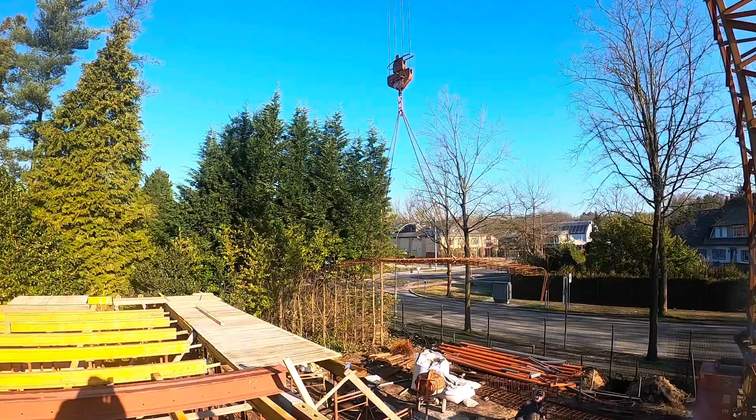Another cage, Johnny Cage.

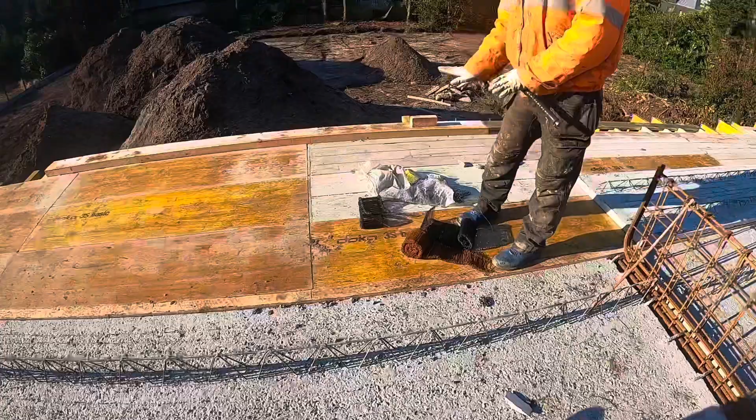You can create this beam. You can put the net here because here is a special net. The net goes like this. We need to bend it up and go into the beam.

Yeah, it's Monday. Bloody Monday.

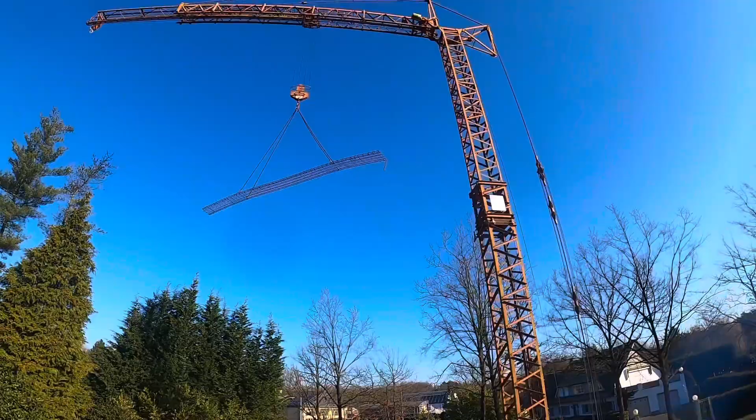So I expect the rest of the floors this noon. So this afternoon we will be setting them. Now we're gonna prepare some rebar here and there. Luckily we have good weather.

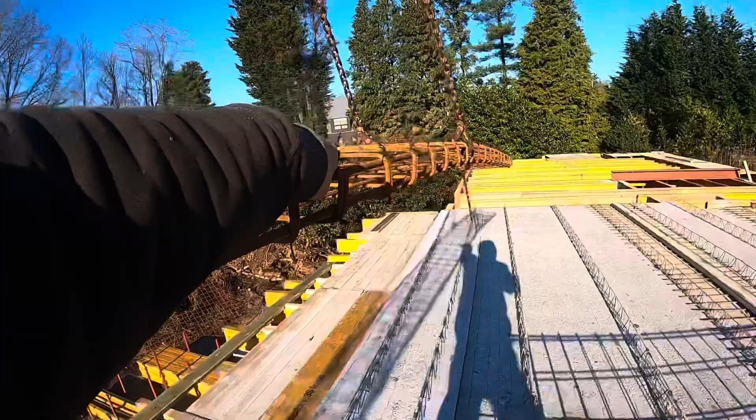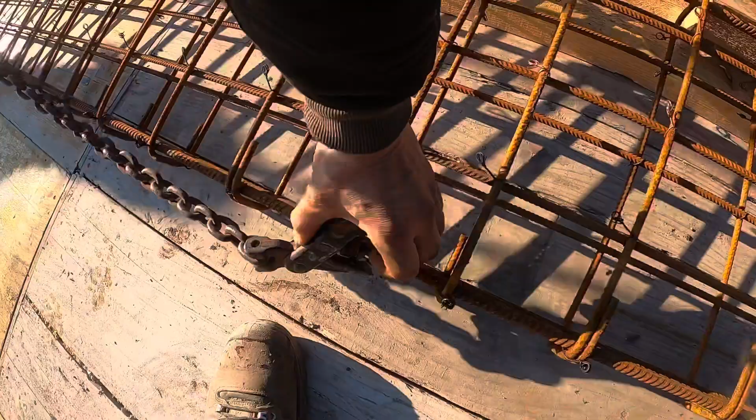Cage man, always wanted you to be cage man.

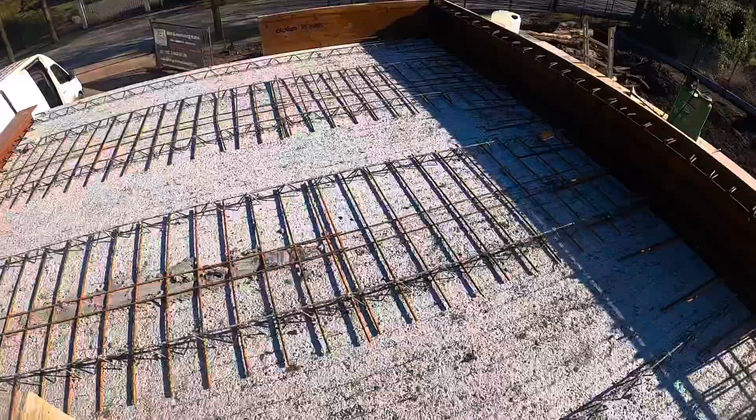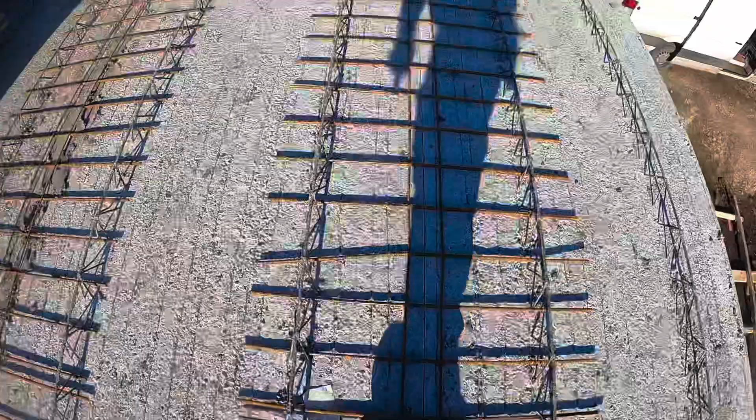Okay, so this rebar is already in place, but this is on every joint of the plate. We place this reinforcement. It will prevent cracking of the ceiling and stuff. The beams are placed. Time for some rebar.

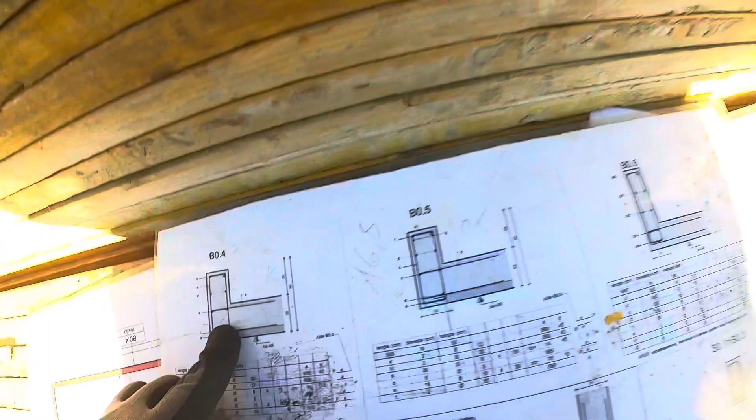So for example, B01, this beam number 1, is this one here, the red one. And there are pins, so B01, I go to the cut. B01 here, we see these pins installed. So before we close the shuttering here, we need to make sure we installed everything that needs to be there.

But that sounds logical.

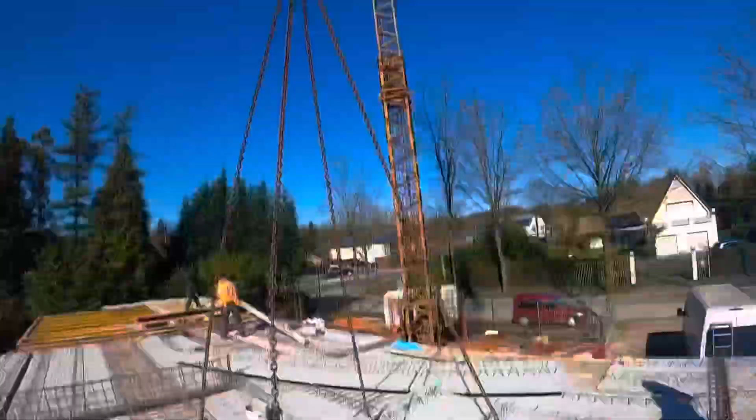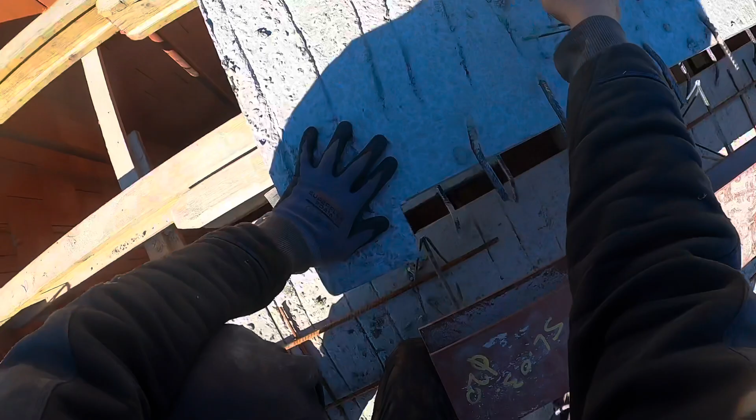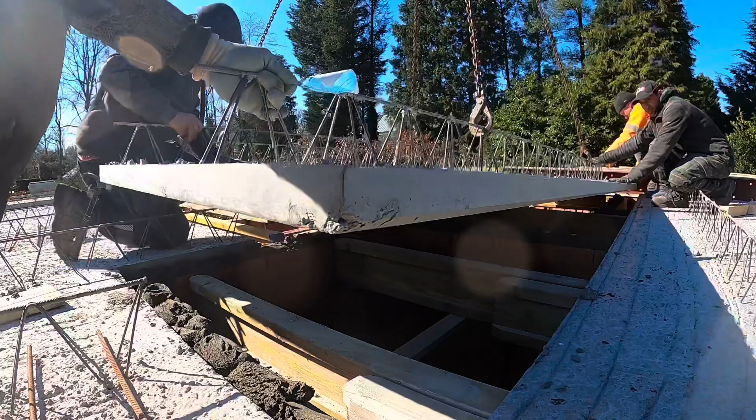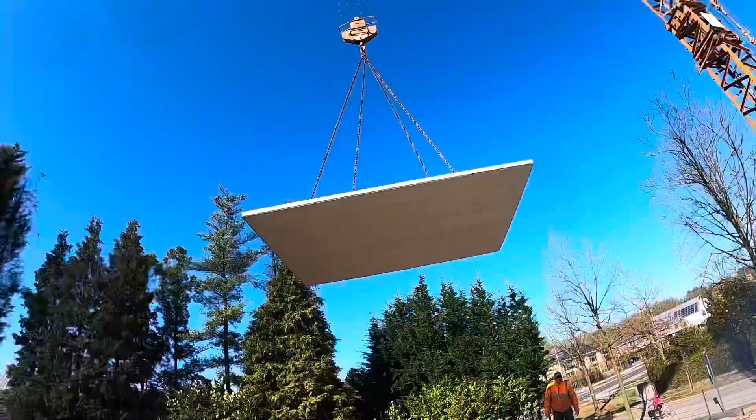So here it goes smoothly. I like it a lot.

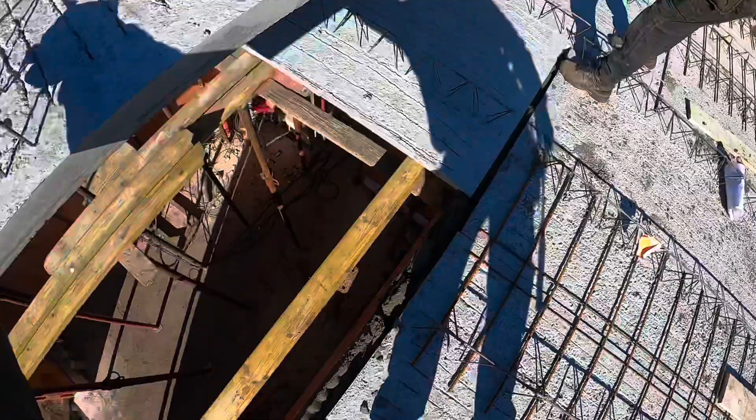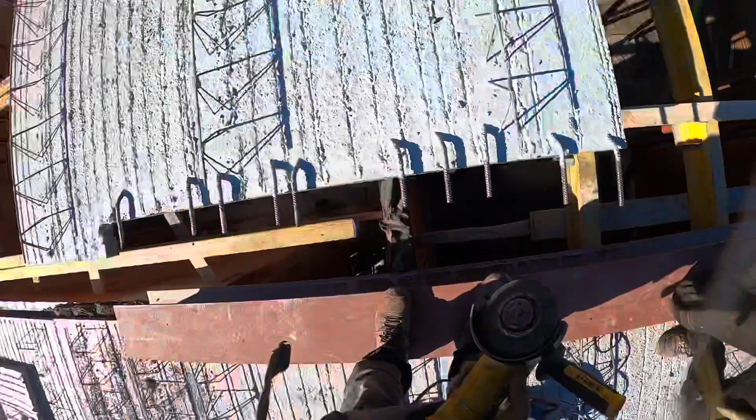I have 5 here. This one we need to cut. Yeah, these two. Long one. Metal disc. Small disc. Yeah, these two, yes. We need to cut because we need to go more into the beam.

Very nice, very nice. We can. Oh, wait a minute. Yeah, it's possible. Just a little bit. Oh, yeah, okay.

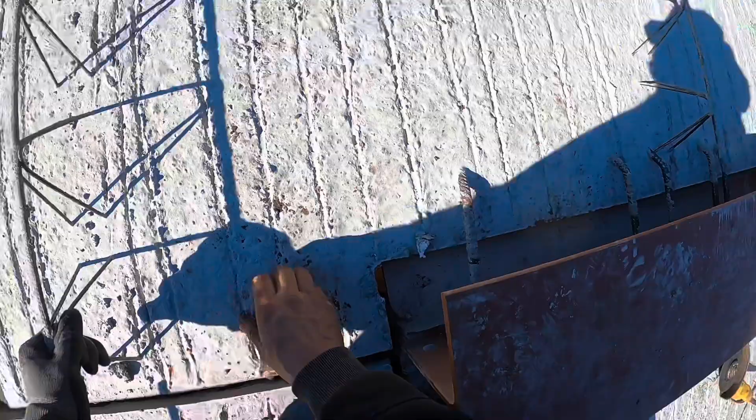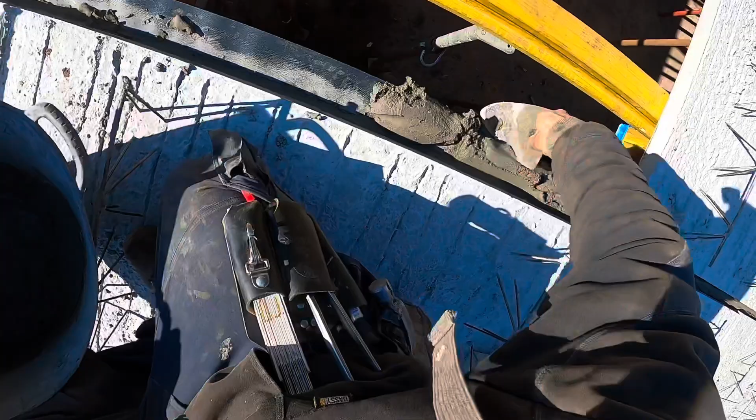So it's actually like bricklaying, yeah. Only the bricks are giant, and you need a crane.

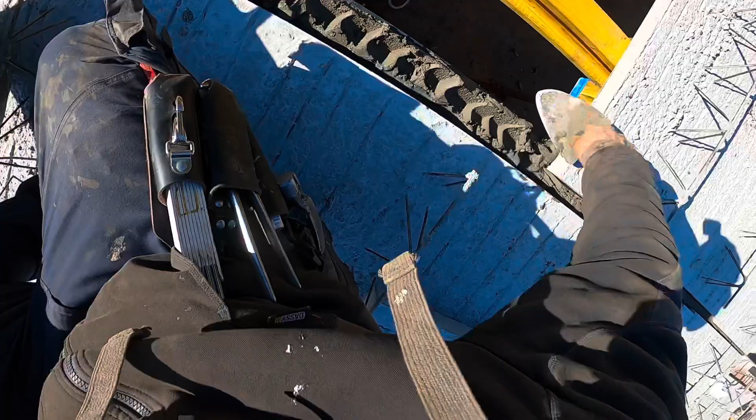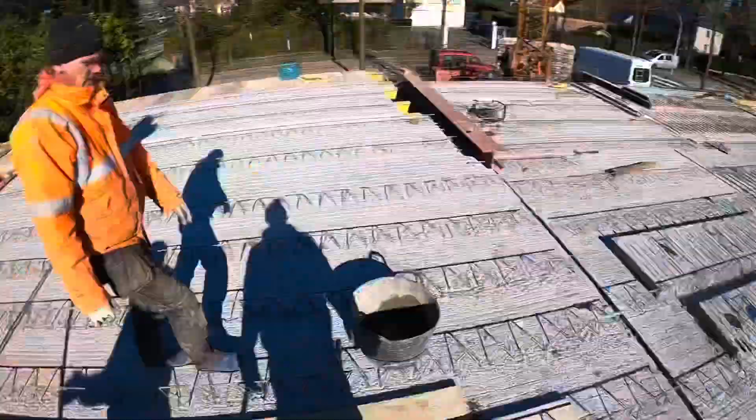This is the last one. It is the last one. It's the last one. No, not true, two small ones there. The guys will put it.

I think for the rest of the day that's remaining, we're gonna do some rebar.

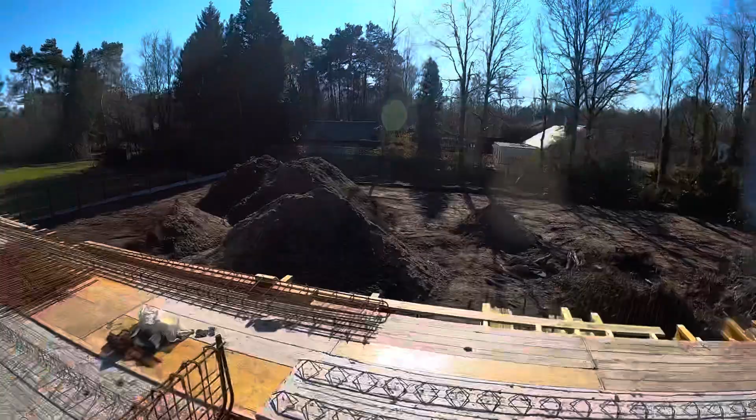We have some internal beams inside the slab also. It's like a hidden beam, but it's important because they run some bigger rebar through it for the overspanning.

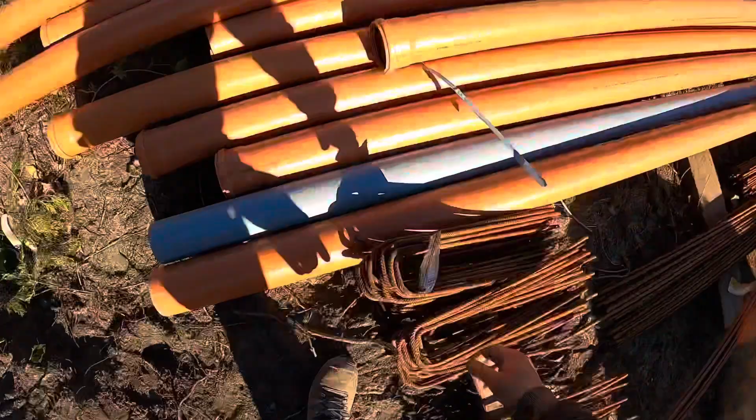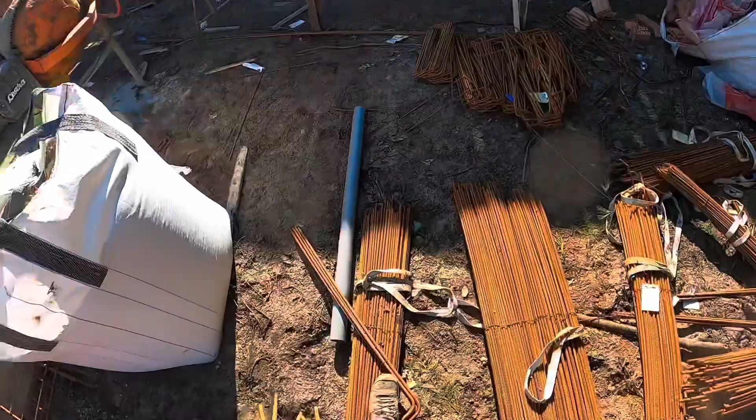Yeah, so actually these are 1055 and I actually need 955. I think the company were a bit lazy and they made them also 10, but hey, no biggie, no biggie, biggie smalls.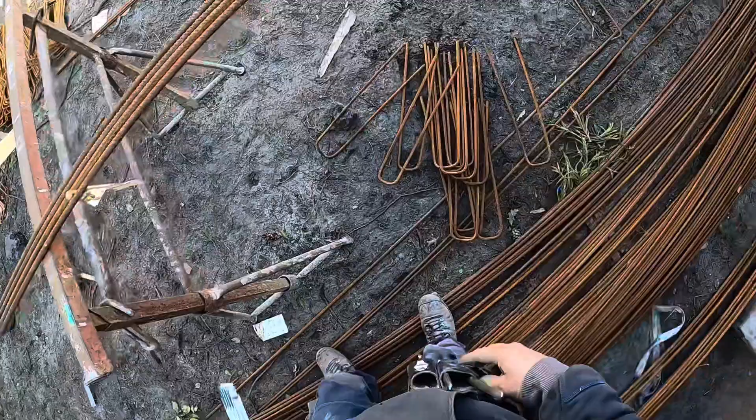It's like a small hidden beam in the slab, this one. It's at the end of the slab actually, yeah.

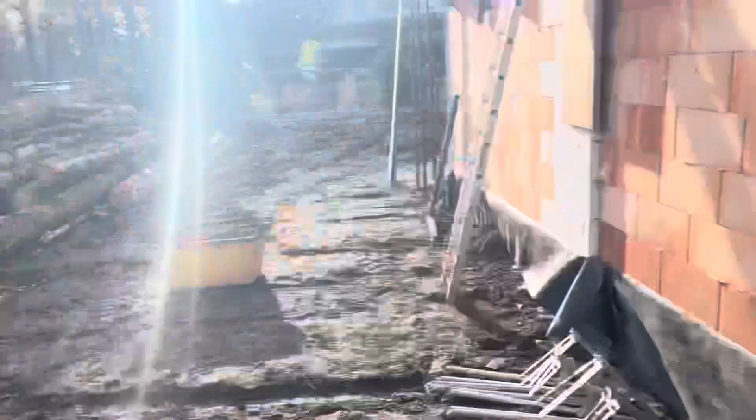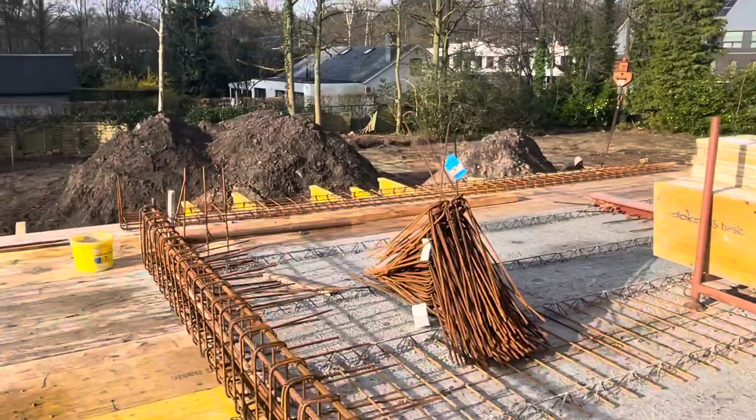It's time for some rebar. So there's a lot going on for the rebar. So it's actually a combination of the precast floors and the rebar that will form a big concrete slab.

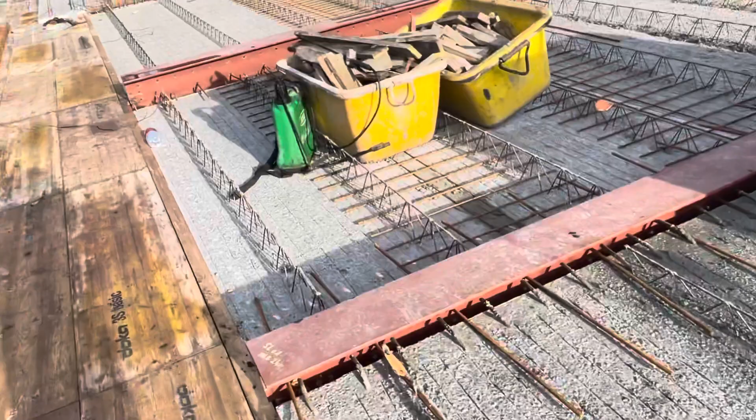All pre-drilled holes in the beam. It's all for rebar that will go through it for the stability.

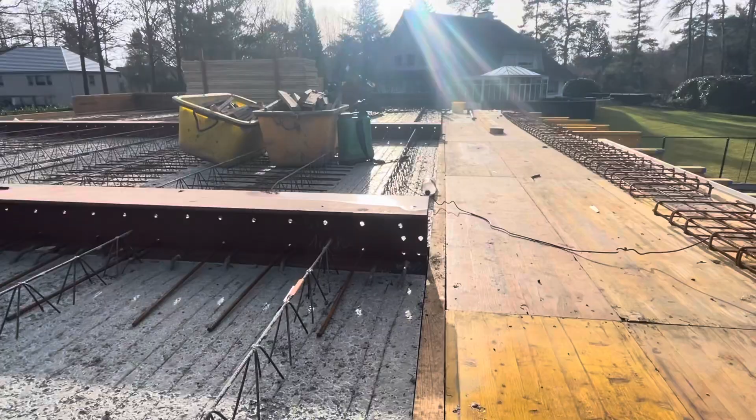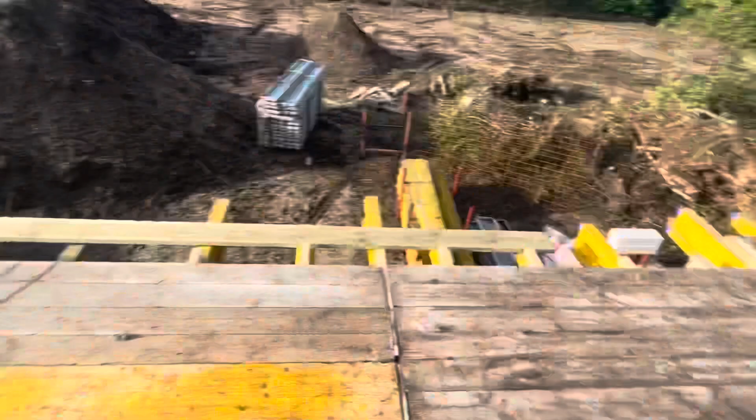This part here is gonna be full concrete slab. No precast floors here, breedplaat we call it in Dutch.

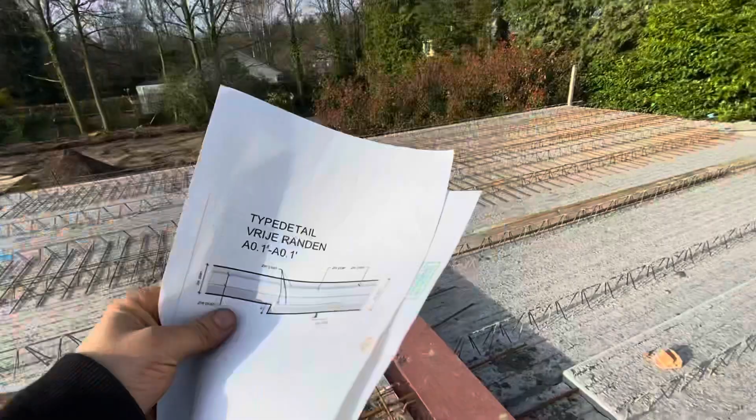Every zone we have some drawings actually. Luckily we have this. Under this plate there is no support from walls. We have only the beam here and the beam there. But this floor is cut in two.

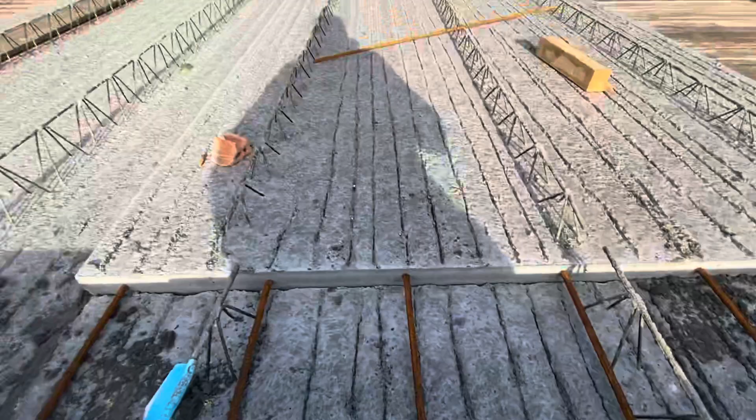See? The line here is cut in two. So if you add no rebar or something and you do the concrete, it will just hang on these bars here, which is no good. It will crack for sure and maybe fall apart. Let's make a line from the beam.

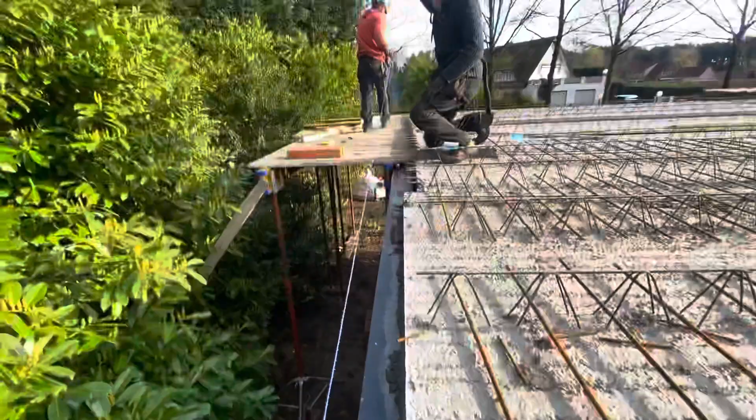It's on this wall. Beam 05, B05.

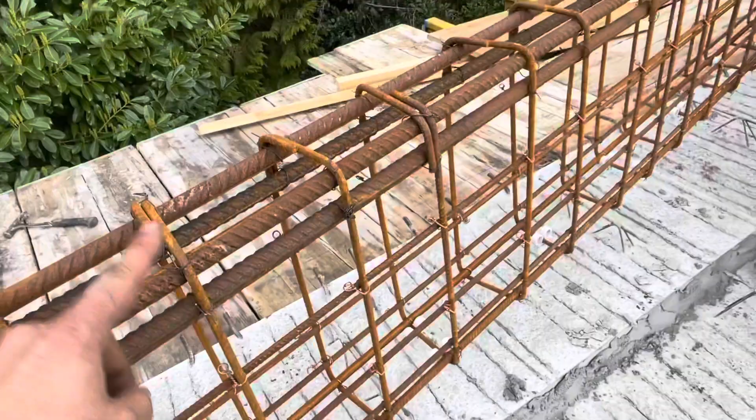Here we have the big bars up in the beam, not down in the beam. That's because the pull zone is up there and the compression zone is down there. And this beam is actually different.

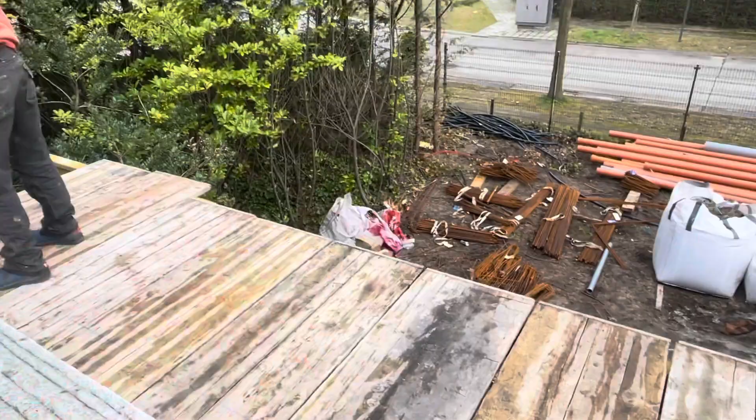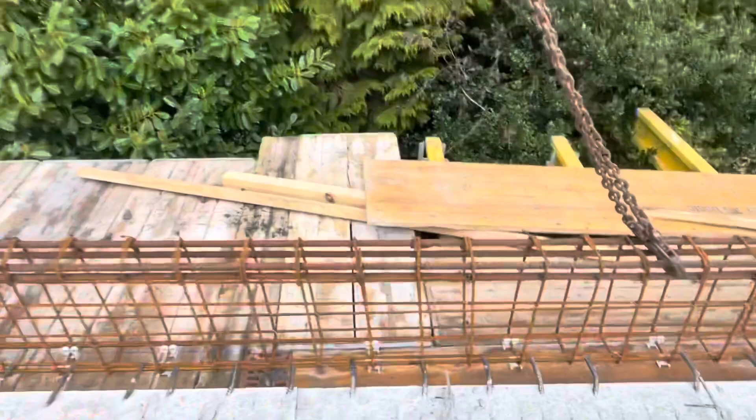In this beam the big bars are down and the small bars are up. Because this beam will carry this beam. So here the most force is down there, the trek zone, the pull zone.

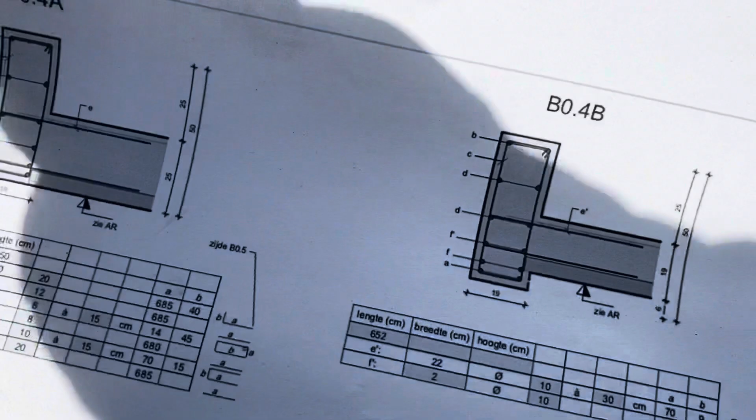So these are some drawings. B04A, B04B. Here we got a level difference in the ceiling there actually. So I'm looking for some extra rebar.

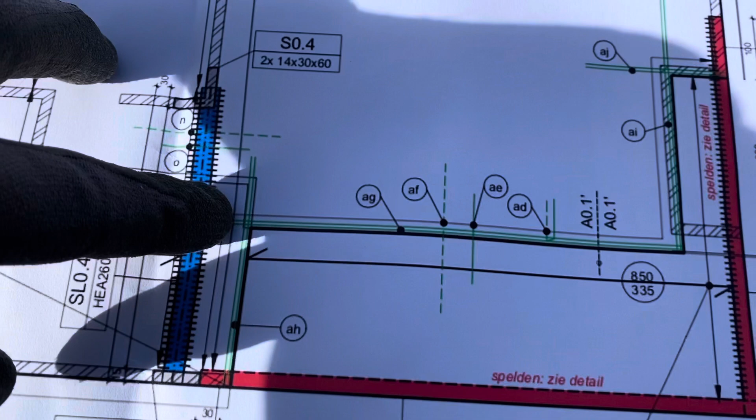This here, I wanna make this rebar first. So I need the bars AH, AH, AG, AF, AE and AD. AD are the pins.

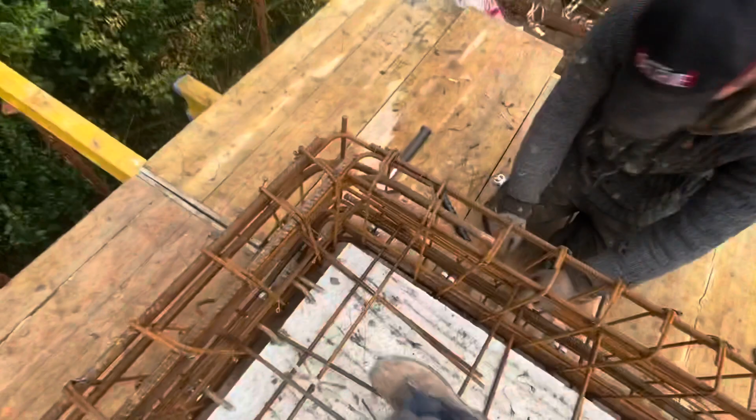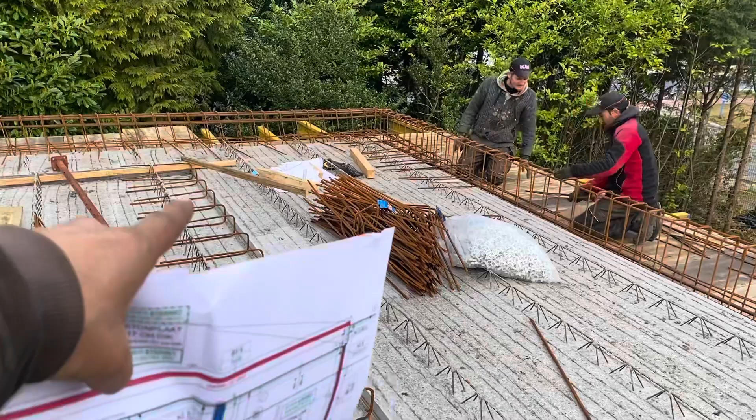We have a pretty big beam here. Okay, so we got a plate, a panel going from this beam to this beam, but there's a level difference and they cut the panel in two here. So this looks very funny because the floor here has actually no support down there. There are no walls or columns or anything like that.

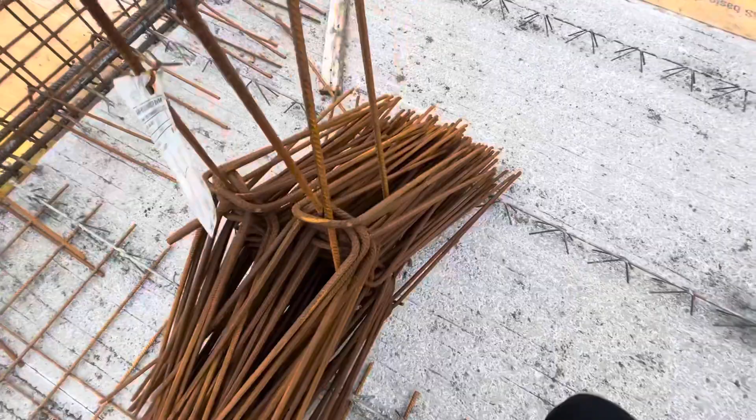Pins. Pins. Beams. Cages. Johnny Cage.

Rebar or something. 37 pins diameter 10 every 30 centimeters. This size is 15 on 55 long. So we got all the information here.

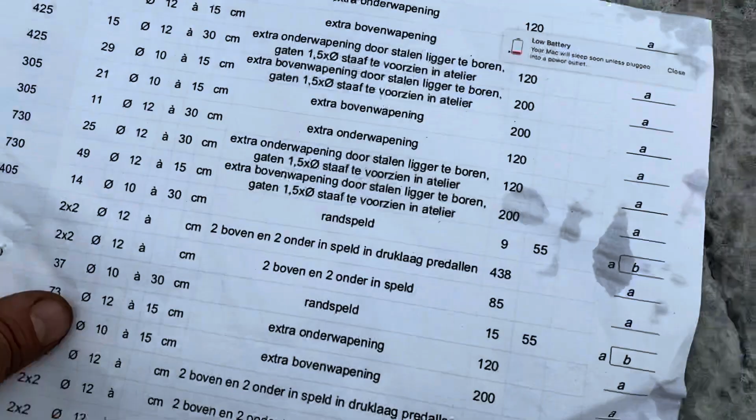It's just a matter of putting everything together and not skipping any rebar. It's actually some kind of beam in the slab, with these bars. Let's slide them in.

From here maybe. Boom, here we go. It's a perfect fit. See? Hopla. 4 more.

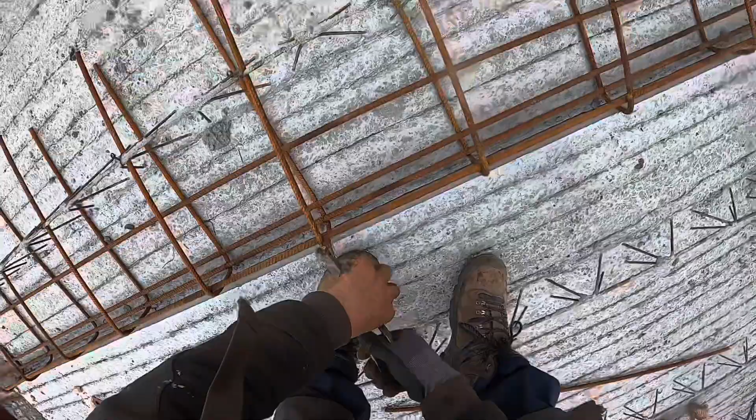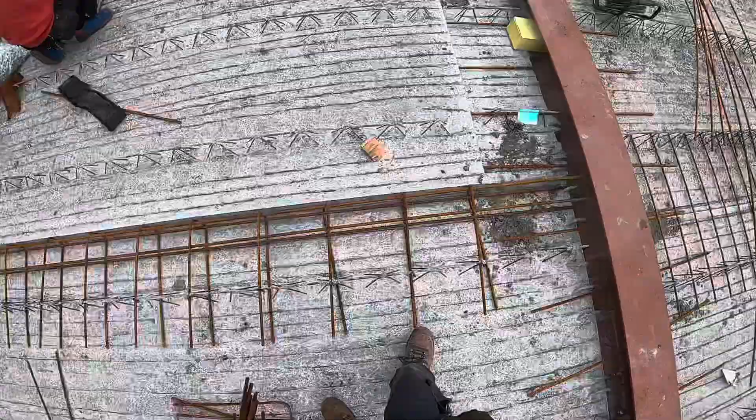So get some more pins. It's for here.

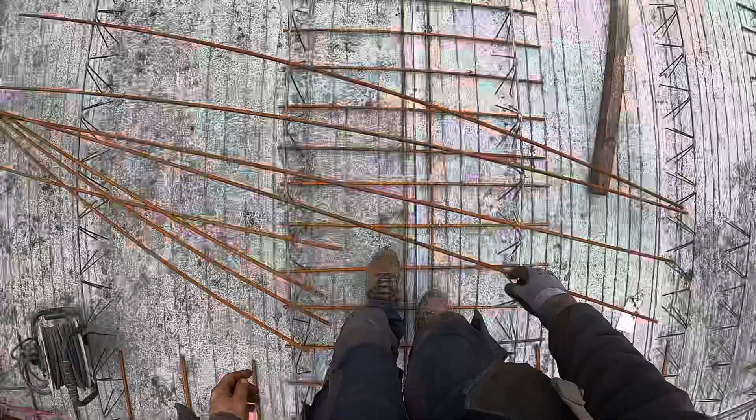These bars, it's gonna be these ones. Same.

Maybe I should first do two pieces.

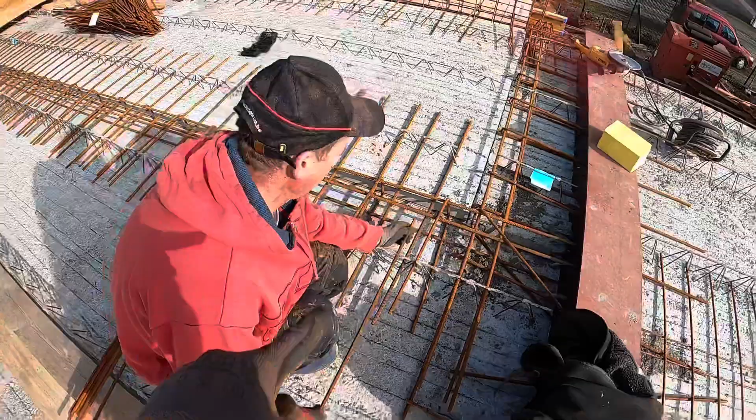Hairpins, rebar, the extra rebar here to carry the slab here.

Also some extra reinforcements right here.

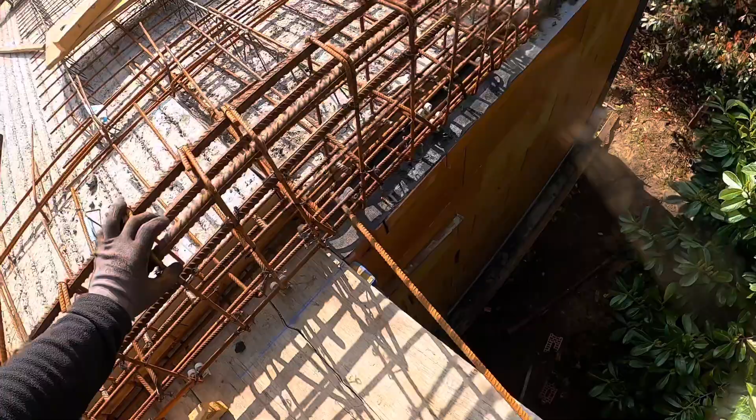Like that, and then 2 down, 2 up.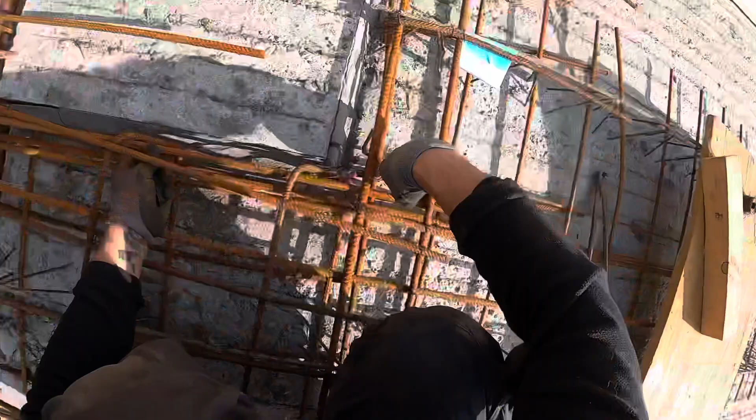Up right there, let's put it in there. Let's put it in here. Yeah, that's a bit better. Oh yeah, oh yeah, oh yeah.

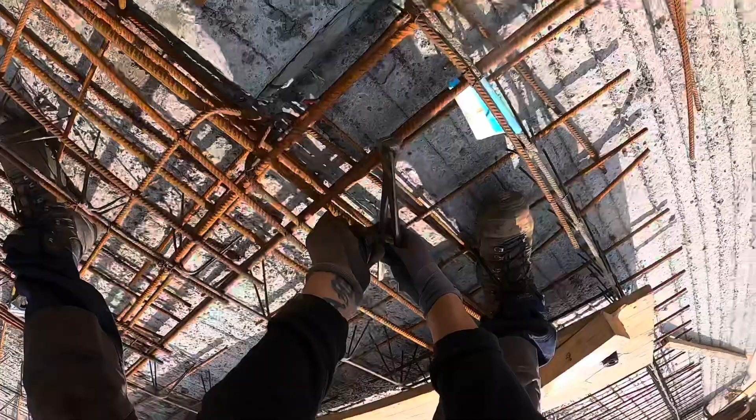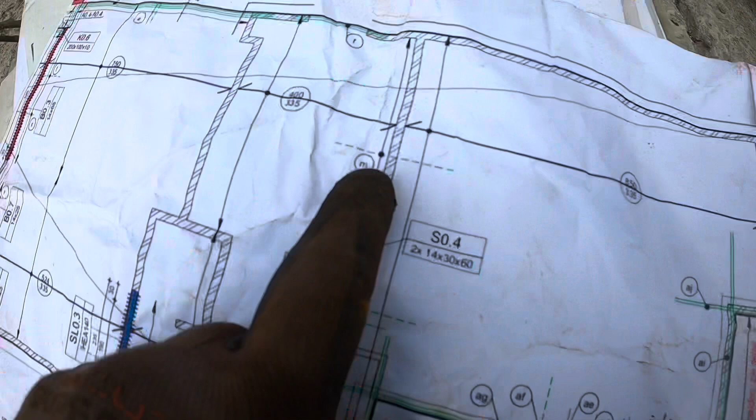So we're about finished with this. We're about finished with this here and this here. Now I need M. So this kind of line means the rebar is up in the slab. So I just put them ready on the ground, and when we come with the top net over it, we will put them up.

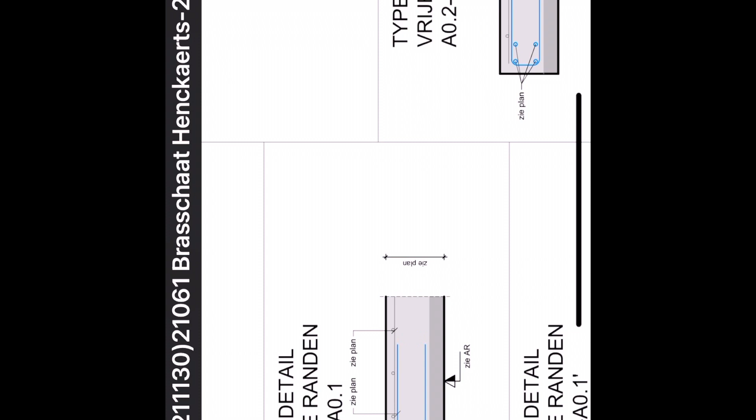Yeah, it's almost 4 o'clock. Not bad, huh, for one day's work. Setting the profiles, because we start setting profiles today, and made the first courses till the DPC.

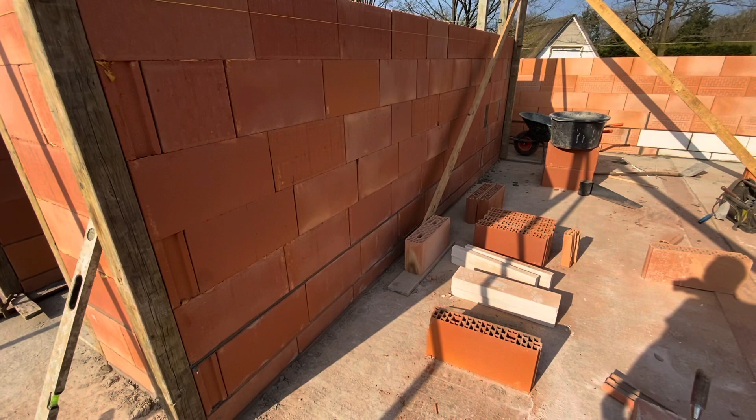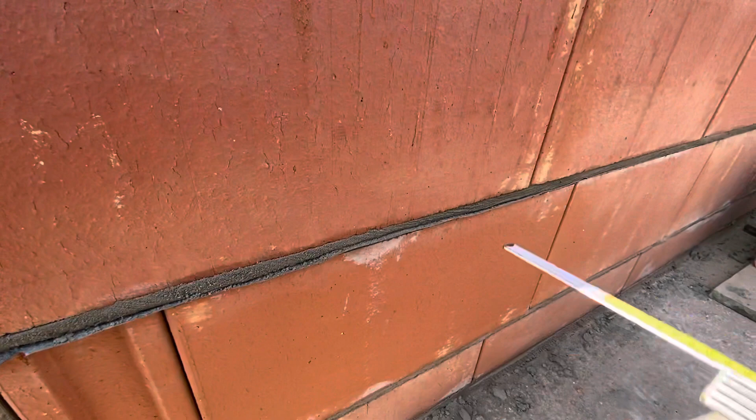It's not really necessary to put the DPC on the first floor, but you can say when you clean the floor with a lot of water, when you mop the floor, it's a damp proof course there, huh? Because, let's say, our zero is around here, 2 centimeters up the DPC. I mean our zero is here, 2 centimeters under the DPC.

So when you clean the floor with much water, you can wet the blocks, and this will prevent your plastering from getting wet also. Not necessary, but it doesn't hurt.